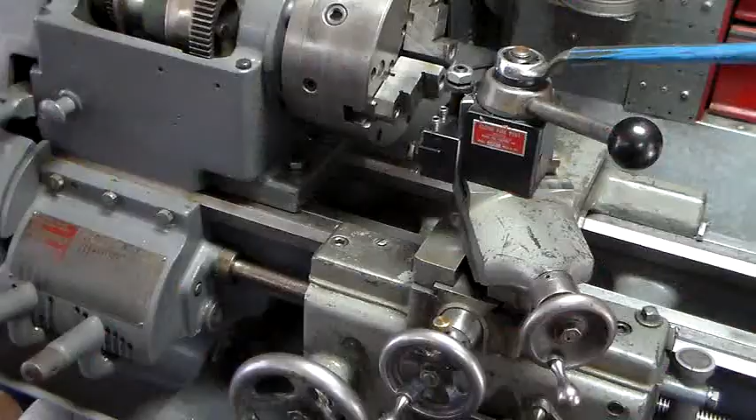Good afternoon. I'm going to try to show you why I spent the time to try to figure out a good carriage micrometer indicator holder for my old Logan flat belt lathe. I've had 2 or 3 of these over the last 50 years. And due to their casting design, there's not a flat spot on them. So every time you go to put an indicator on them, they just don't hold, they don't stick, they slide, they move.

Now, Abom79, Adam Booth is my hero. Of course, he's got big equipment where in the table area there's lots of room between that and the carriage. And that allows him to just take a mag base like this and throw it up here, and you can run it over and boom, you're in.

However, a lot of times this doesn't give me enough throw to work on the piece. And it's not very big, this is less than a ½ inch right here to where it actually mags on. And I mean, it's real scoochy and it moves around. Okay, so that was number 2.

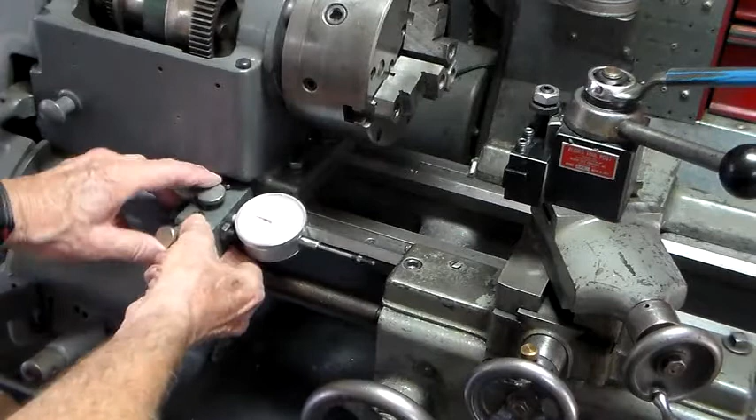The first one I tried to use was this, and this is actually something I made probably 30 years ago. This is a copy of the normal carriage stop for the Logan lathe, and you simply set it on like it normally went on, locked it down, and it worked great as long as you were working way out to the right. But of course what happened is you quickly ran out; the tool is still 2 or 3 inches away, and this is only a 1-inch travel. And you can't go any further to the left because of all the framework. So that one's kind of out.

All right. Now, what I wanted was something like I keep seeing Adam use on his YouTube channel, something magnetic that sets up over the way like this, and it sets on there and it's held by a magnet. And this is really very nice. It stays put. It allows you to come over. You can move it way back to the left, clear up into the pocket here. And the stem of the indicator misses this back here.

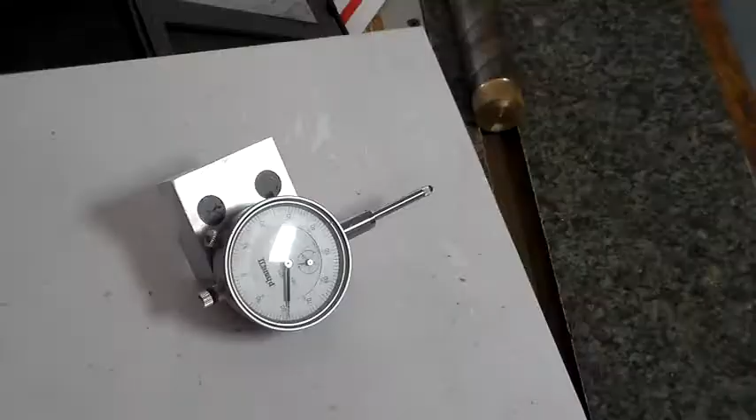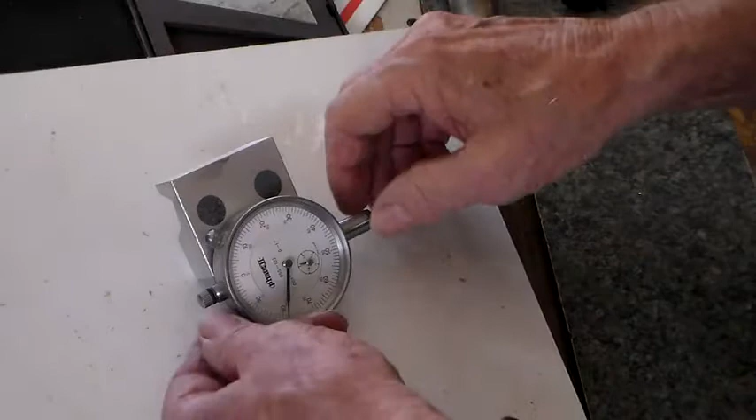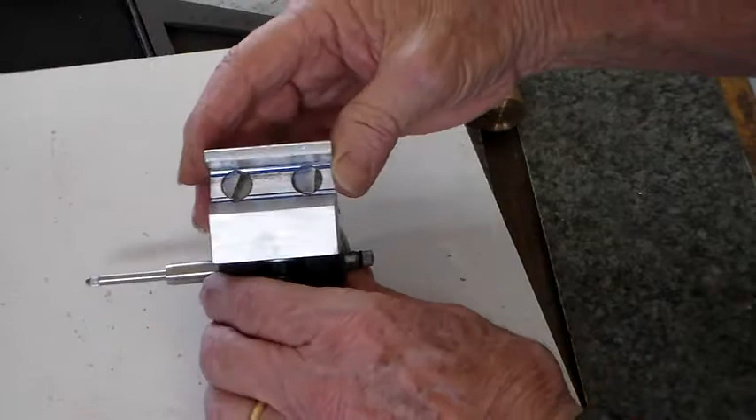Okay, so we'll first take a look at this thing all put together, and it's actually simple, but it's difficult to make, if that makes any sense. There's lots of angles, and one of the biggest problems, if you make it just like the original Logan carriage stop where everything is straight to a 90, is there's no clearance any place for the stem of your indicator to go out. So you have to drop it at an angle. So anyway, here's the back side, and this is machined out of a 1 by 2 inch block of aluminum.

The first one I made, I usually make them out of plastic or starboard or whatever you want to call it. It's easy to machine. I actually only made it 1 inch, and that gave me only one magnet. That was just not enough. Too much leverage, and it moved around. Okay,

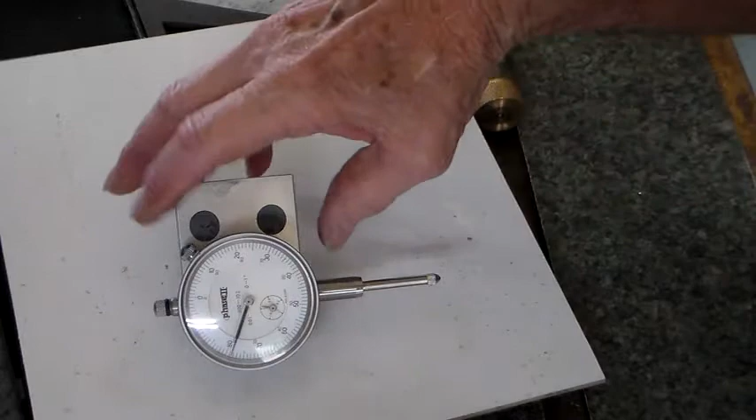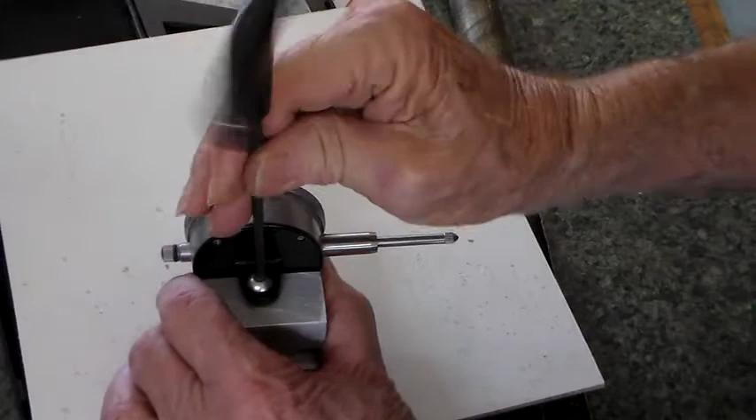there's one button head that holds it on, and I used a spacer washer only because the post on the back of this dial indicator is not perfectly straight. So here's a picture of the whole thing.

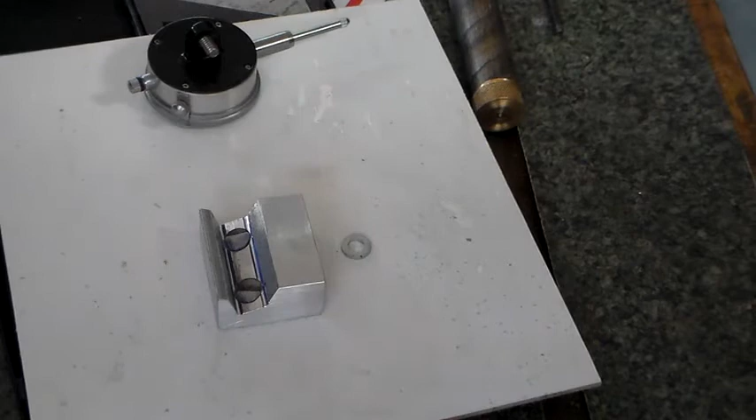This is simply JB Weld to fill up behind the magnets, and I used some of this Loctite 620 to fasten the magnets in.

And in a minute I'll go over how I did it on the milling machine, and really, it gets a little confusing with all the compound angles and the clearances. So anyway, let's take you over to the milling machine, and I'll show you how I had it set up.

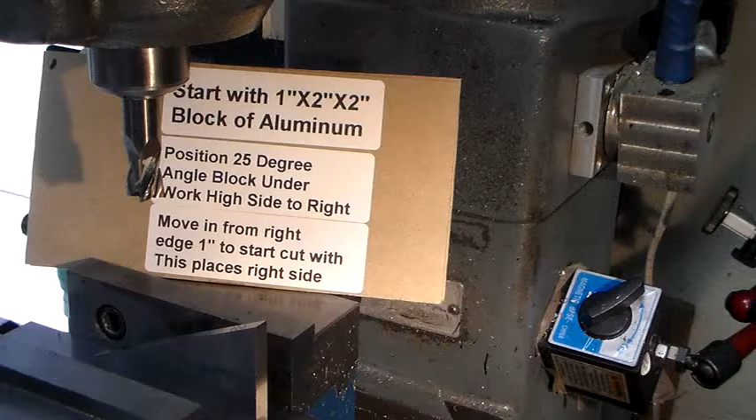Alright, now don't forget this is filler, and my neighbor told me I needed to display these dimensions and that's better anyway, but so anyway, here we go.

Okay, so we're starting with a 1 inch by 2 by 2 block of aluminum, or whatever material you decide to use. And here's our 25-degree angle block. We simply set it in, position it high enough so when you're cutting it, your milling machine cutter does not hit. Okay, now we're going to, actually, I'm not sure what's going to happen with all the filming, but we might even move off frame.

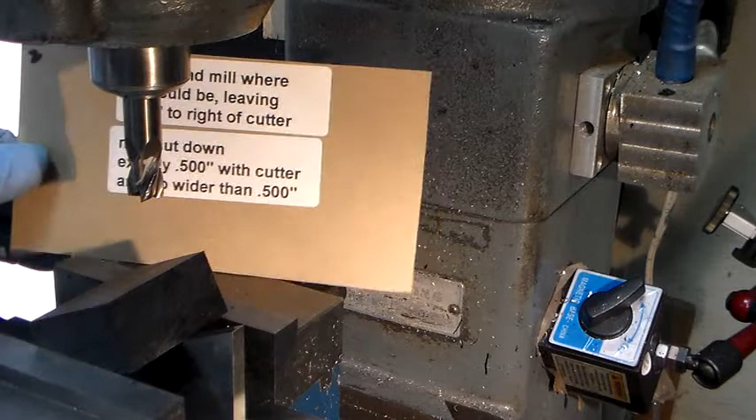But we're going to start over here and bring this side of the cutter down to this edge. And then we're going to move over exactly 1 inch. And for this demo, I'm not going to try to read my readouts because they're too hard to get to. So anyway, this places the right side of that cutter on a 1/2 inch end mill where it should be, leaving about 750 thousandths to the right of the cut.

Now, by the way, make sure you don't make this cut any wider than a 1/2 inch. In fact, this is an end mill that has been reground, so it's a little bit less. So then you simply start your cut and plunge down 500 thousandths, a 1/2 inch. So you're going to end up with a slot milled through here, 3/4 of an inch in, 500 thousandths inch deep, and the full width.

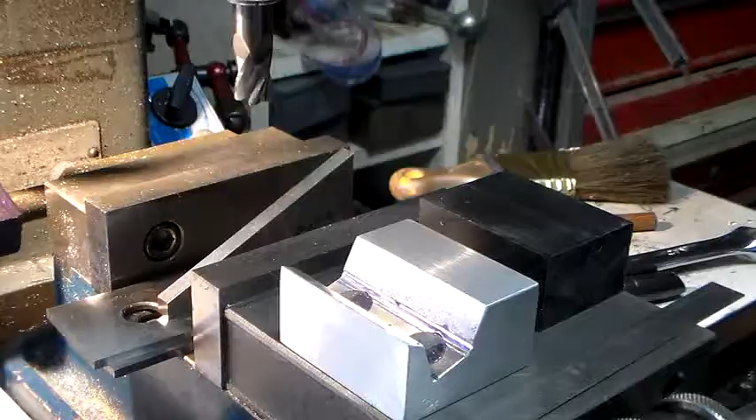And you're going to do it with a 25-degree angle block with the high side of the block under the right. All right, let's take the first step here, and I'm not going to actually machine a whole one of these because it's really a lot of trouble.

But what I found out, to get the correct clearance and the tilt you need on the face of the gauge to where you can actually read it easily and make everything miss all the castings and etc., is I use a 25-degree gauge block. All right, simply set it in. And this piece of starboard's not quite big enough, but it's going to turn out okay.

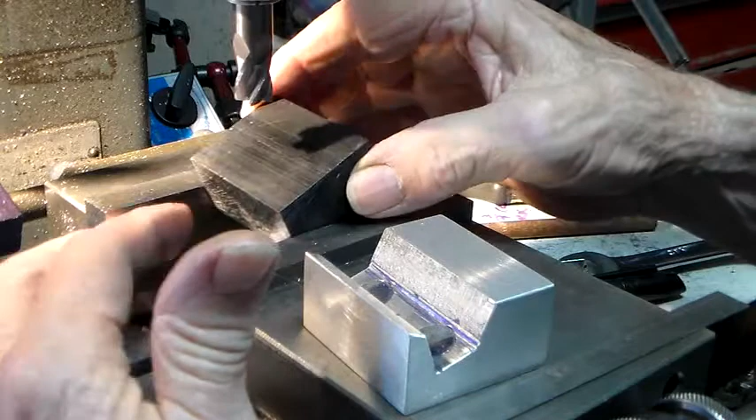So anyway, set it in the long way, and if you happen to have two of the 25-degree angle blocks, it's a lot easier. But with this, what I do is set it in, make sure you got enough clearance all the way around. Just snug it up, and then don't beat it hard, but take a brass hammer or something and tap the back of the angle block, and it'll square it right up to the bottom for you. Then go ahead and lock it down. All right, now you're through with this for a minute.

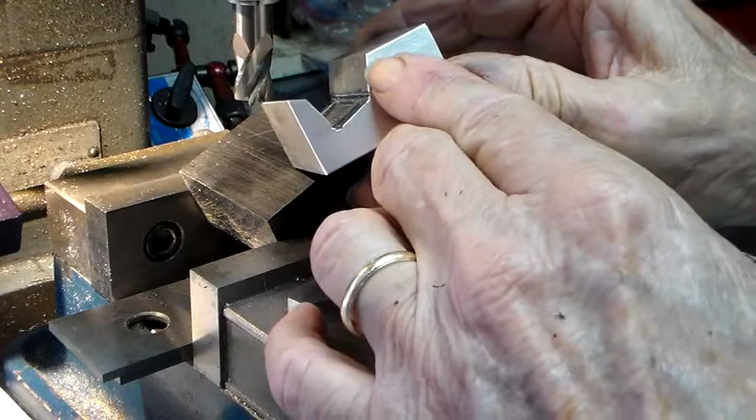Now the first cut we're going to make is actually this cut right here. Okay? So what we're going to do is take the far right hand side, in this case, of the 1/2 inch cutter, and we're going to touch off. I'm going to have to make this a little bit different than this one because the material was not quite the same width. But anyway, I'm going to bring it over like so and come down.

Start the mill. I guess it'd be better to have it running the right direction. I was tapping with it. Okay, so there we're just barely scratching it. I'm going to come back out here.

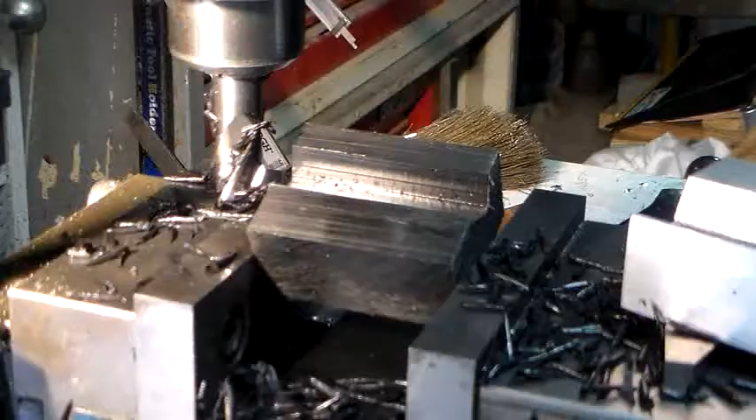Now I'm going to stop the camera for a minute. We're going to actually go down a 1/2 inch total. So everything is a 1/2 inch, a 1/2 inch, a 1/2 inch. Okay, my first cut was 300 thousandths deep, and I'm going to take the last 200. I'm running this slow because this plastic had a tendency to melt, or at least get sticky.

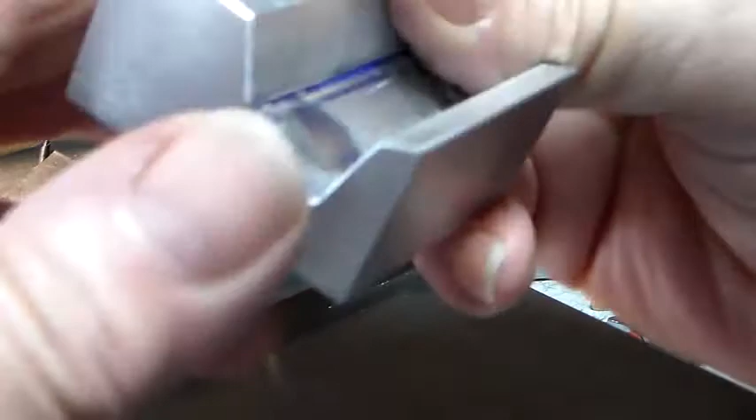All right, now that was step one, that you're going to use this 25-degree parallel on. Slide it up. Okay, now the next one, believe it or not, you're going to reverse it after a while, and you're going to turn this whole piece around, and you're going to use that same one to drill the magnet holes. Now I selected 1/2 inch magnets.

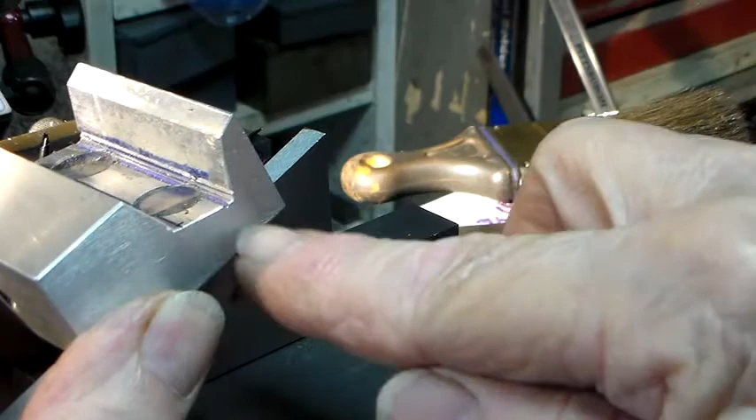Alright, and so actually you set the same angle block in like so, and you end up with this nice and level. Simply drill the 1/2 inch holes. I actually just used the end mill. I do suggest that you make them loose, though.

Don't do like I did, using the aluminum block and those hardened magnets. When I used the Loctite to put them in, I ended up driving them in and didn't get them as level as I wanted to. So anyway, make those holes a little loose.

All right, and then the last time you'll use this 25 is after you get the 90-degree V cut in here. You set it back in here and you cut this angle right here. So you're going to use this 25-degree angle block 3 different times. All right, let me get set up for the next thing.

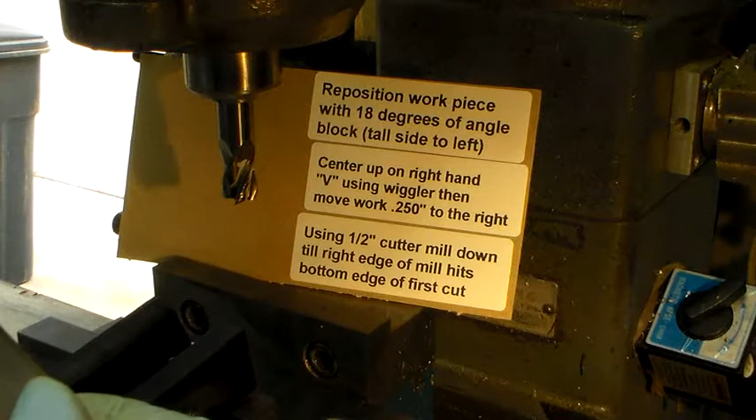So here we go again. We're now using 2 angle blocks, a 15 and a 3, for a total of 18 degrees. This time we're going to set the high side on the left. All right, and I'm going to use a workpiece I've already done before and simply show you that we're setting it up and tap it with a hammer to get it straight.

And what we're actually trying to do is mill this bottom here flat, and when you mill this flat here, this side automatically becomes 90 degrees to it, and that's actually your V. So we used a wiggler in here to line up on this side, and then simply move the 1/2 inch bit 250 thousandths to the left, or move the workpiece to the right, and then use that 1/2 inch cutter and you mill down until the bottom of this part you're working on now just kisses the corner of this side.

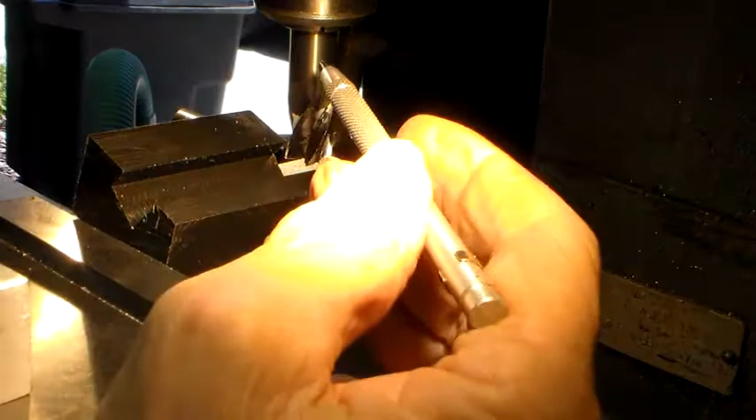All right, what I've done is removed the wiggler, put in a 1/2 inch collet and my 1/2 inch bit, and I've moved the table to the right 250 thousandths. The idea is we want this far right hand side of the milling machine cutter to end up right here in this groove. Okay, so here we go. Gonna make it in a couple cuts.

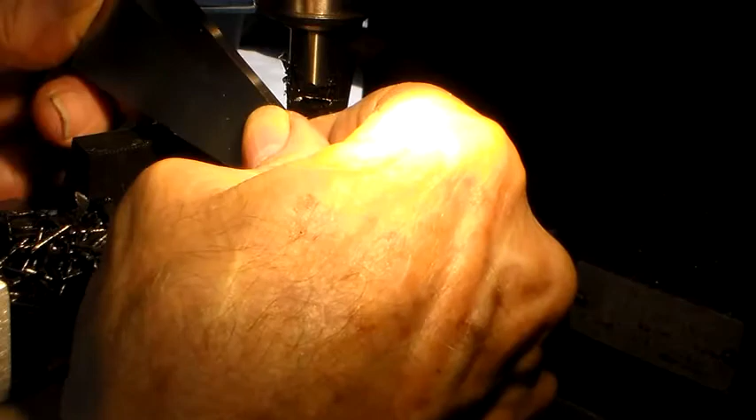And by the way, I apologize for not letting you know the angle of this, but it's about 18 degrees. So these 2 angle blocks put together give me 18 degrees. It was rocking between 18 and 19, and really for what it's for, I guess it's truly not that important. All right, and clean out some of the chips here.

Believe me, this really all looks weird when you're trying to lay it out. We got about 4 or 5 thousandths to go yet.

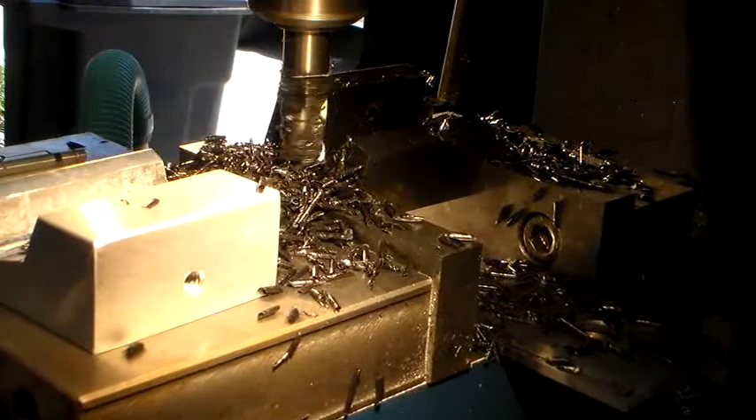So that's actually up in here. This is the 90 degree that sets on the way of your lathe, I mean the bed of your lathe, I'm sorry. All right, one other thing we're going to do in a minute is we're going to take a little 3/16 milling machine cutter, and we're going to cut a bit of a relief here and a bit of relief here. I found it makes life a little bit easier. Okay, I'll get set up for the next one.

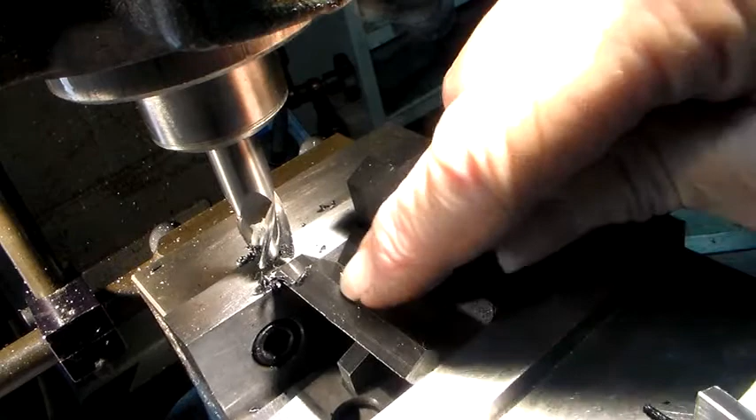Alright, if you remember when I first started the first cut, we used this 25 degree angle block, and we made this cut here 1/2 inch deep. Okay, then we used the other 2 blocks combined to make this actual cut down here, the 90 degree in the bottom. And I told you we'd be using this angle block a couple more times. Well, this is the third time, and we're just cutting the top edge of this off so there's clearance on the bed of the lathe on the flat part on the front V-way. So here we go.

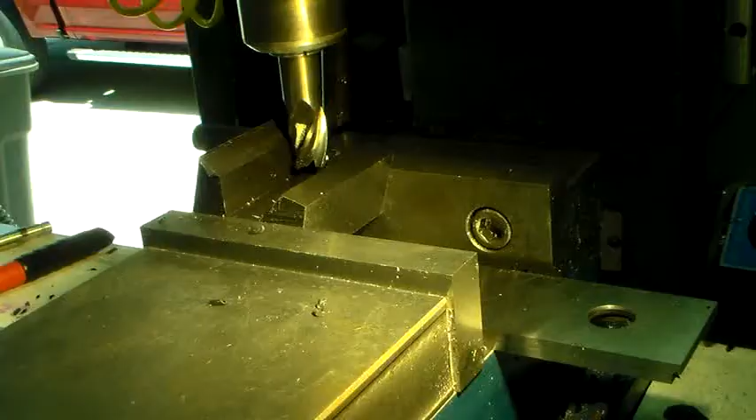Alright, I'll get set up for the next cut. Alright, actually, it's easiest to do the plunge cuts for the magnets just to line up this cut here with the top of your vise. It's not critical, it just lets the magnet meet with one of the 45s on your lathe way.

So I've come in, I used the old paper trick to get close to this edge within 1/1000th or so, and I come in and we'll leave 1/4 of an inch at the back, then we'll come over and leave 1/4 of an inch on this side, and hopefully I can do this. I think I'm just going to raise the table. That way I can stay out of the picture a little.

Now, drill all the way through. On the back side of mine, you saw where I used JB Weld to fill it up. That way, if you have a problem, you can fix it.

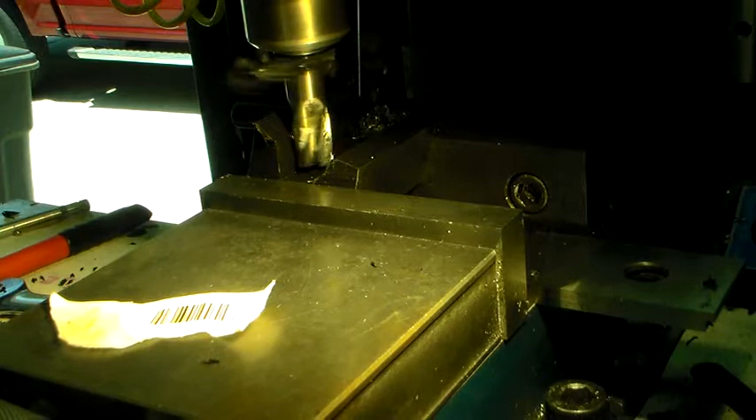Now, I thought it might be necessary to put additional magnets on here, but trust me, two of them hold like a freight car. Okay, I'll be back in a minute.

Okay, what we've done is I took my indicator and set it on here like you would really want it. Because I've checked a couple indicators, they're not all exactly the same size as far as the depth of the hole on the mount. So I drilled it 5/8 of an inch deep with a number 7 bit. This is a 1/4-20 tap, and we're just going to go down a ways. Going to slow the mill way down.

There's a 1/4. There's a 1/2. That's about it. Reverse the mill, back it out. I put this permanent magnet 1-horse DC motor and a control on here years ago. Best thing I ever did. Makes life really easy. Now off camera, I'm going to go ahead and run a bottom tap down to get the most clearance I can. See you in a bit.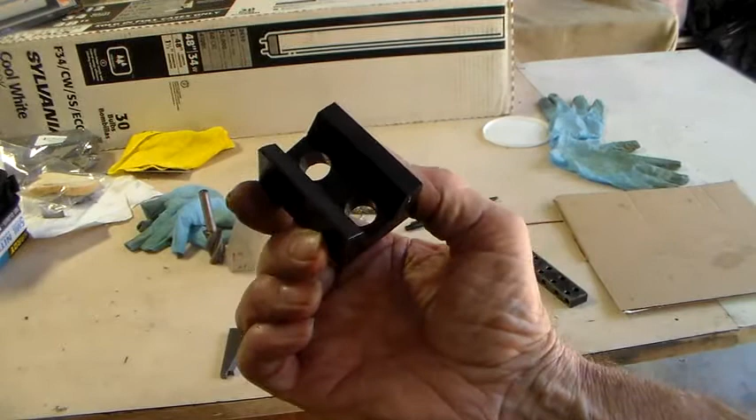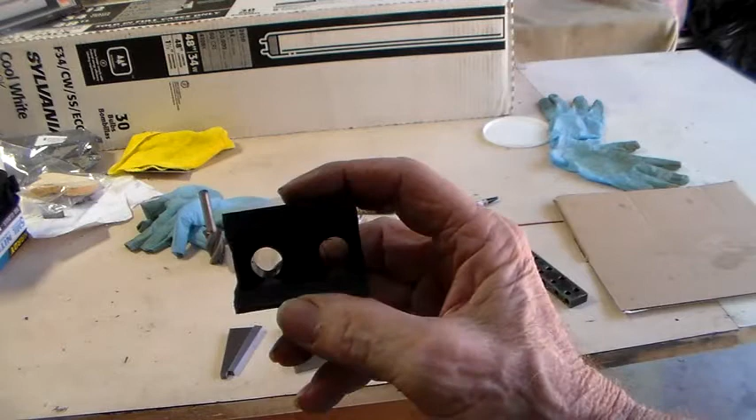Okay, so now the part's pretty well done. I don't know how well you can see that. The angle's all cut. Holes drilled for the magnets. Drilled and tapped to attach the dial indicator. So I'll go ahead and clean it up, mount the indicator. The only thing I won't do is put the magnets in it because I don't really plan on using it.

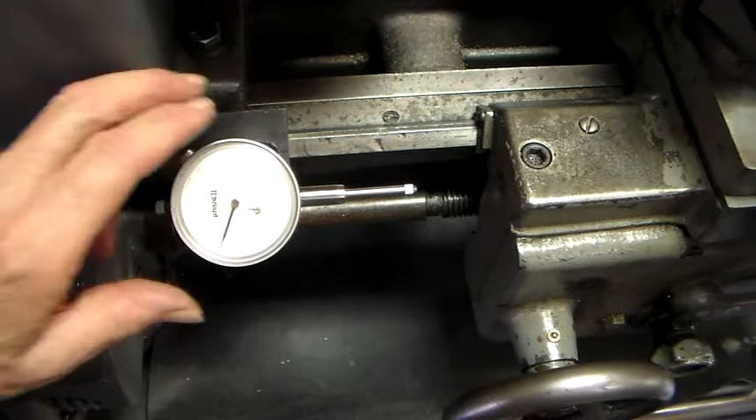Alright, so here's the part we just made. Indicator mounted. Sits right up there. The two magnets will hold it securely in place just like it did on the aluminum one. And there we have something we can move any place we want. Whoops.

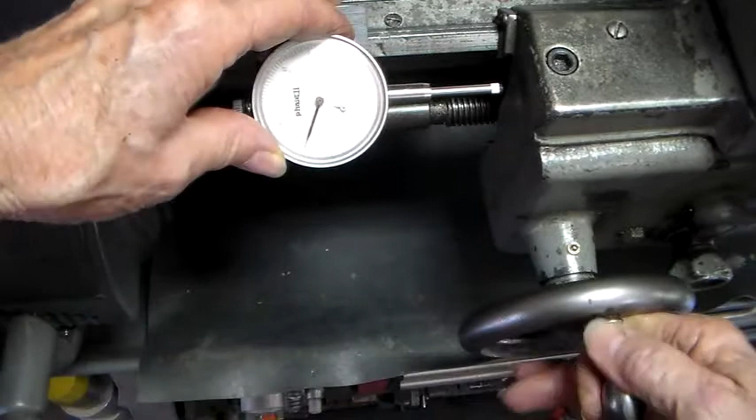No matter what length material we're working on, it'll move all the way back up here in the pocket, which actually, if you tried to contact the indicator, the cutter would crash into the chuck up here. So you get plenty of clearance. I guess you could actually run it with a collet chuck and maybe use the full capabilities.

All right, hope you enjoyed the video. I'll try to draw up some pictures with the angles, etc., on it. Later.

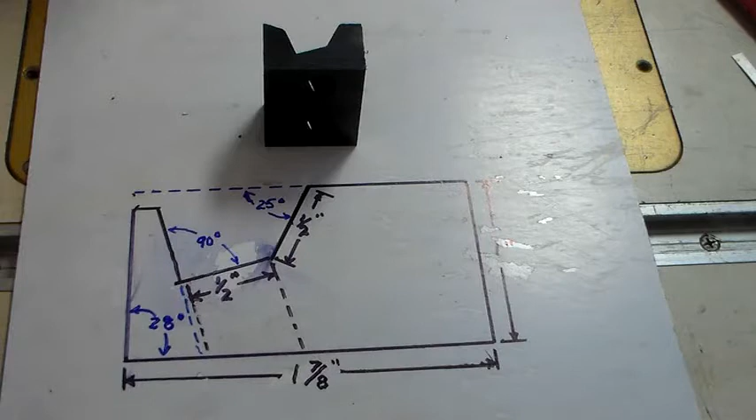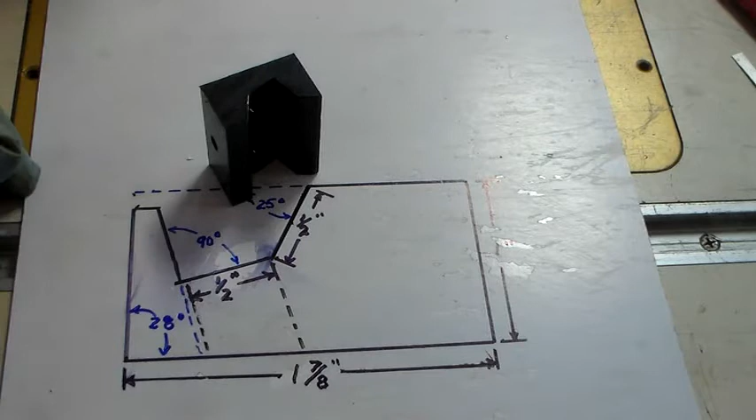All right, to wrap up this video, here's a drawing, and I'll leave it here for a bit. And the outside dimensions, of course, this is taking a look at the end of it. Okay. And the important part is that this V right up here, this is a 90, and that fits on the way of your lathe, the bed. And this is the same 90-degree V right here. That shows you this is a 90.

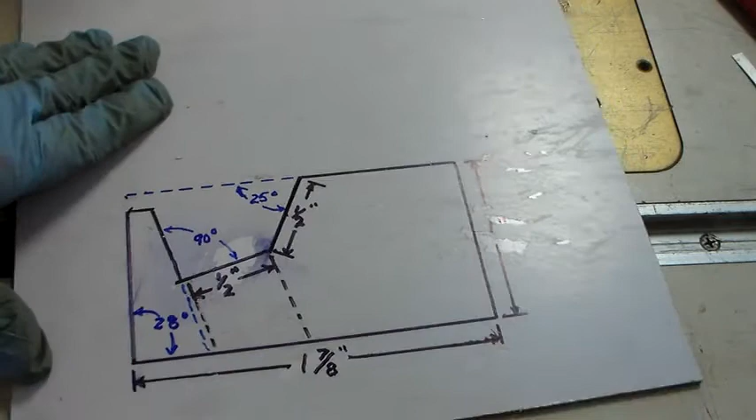These are the other degrees, and like I told you before, to get these, your first cut, here's your milling machine cutter coming in this direction. This is standing straight up. You place a 25-degree angle block under it, make that cut down exactly 1/2 inch.

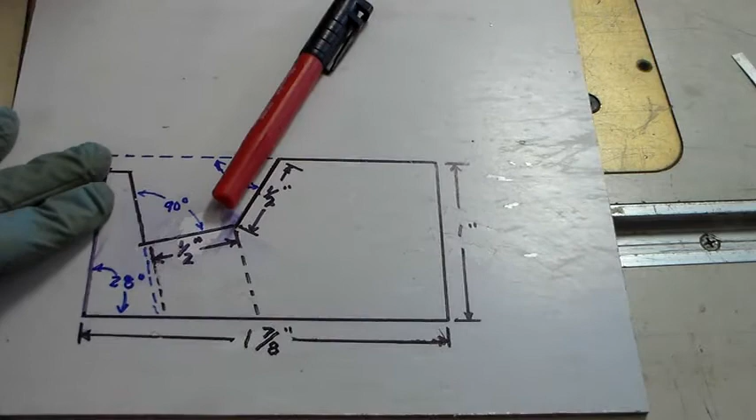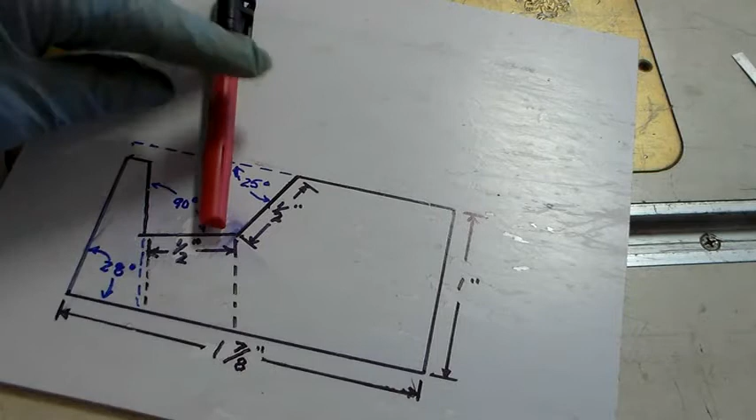All right, then you turn it this way, and this cut, you line up your milling machine bit where the outside edge is just on the corner of this, and I used a wiggler. Then you move it over 250 thousandths, and then you machine this the same thing, straight down 1/2 inch to where these two corners meet. All right.

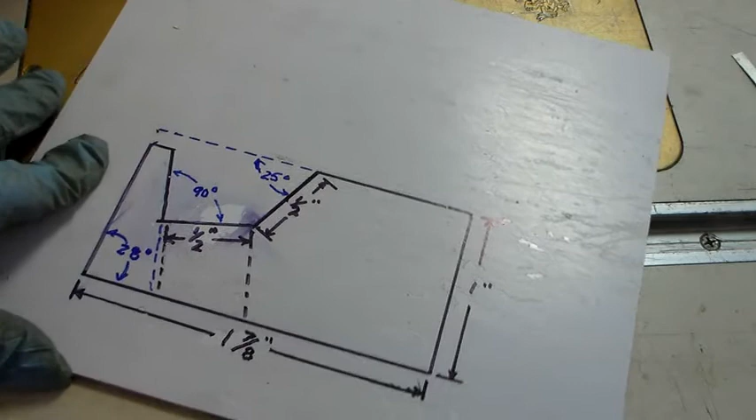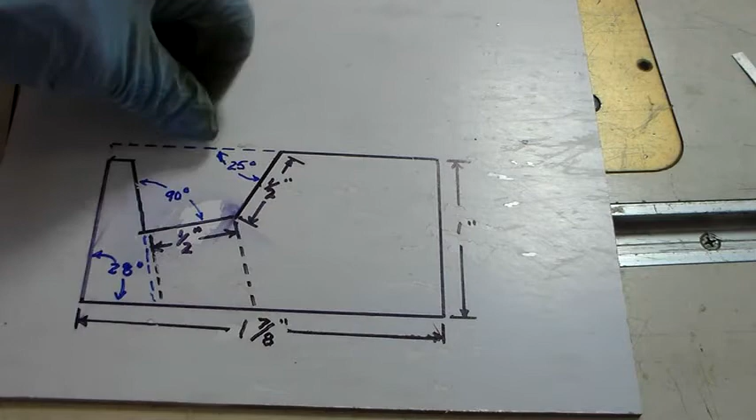Here I'm trying to show you one of the degrees, this is 28 degrees here, what you end up with. So from the bottom straight edge, the only two straight edges on this thing when you're done are here and here. So from here to here it's 28 degrees. Coming across here, this is 25 degrees. So you lay your block here and face it down, it's 25.

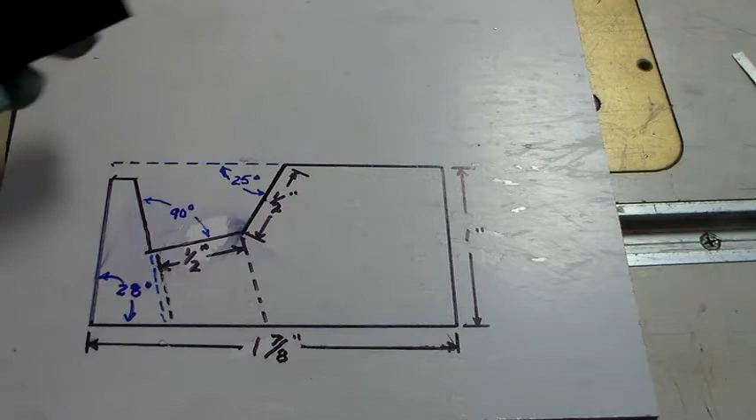So I hope this is clear as mud to you, but your overall dimensions, this shows 1 7/8. It was because the piece of material I had had been machined a little bit already. Could be 2 inches. The length of the item, this end you're looking at the width, the length can be anything you want. About 2 inches was fine.

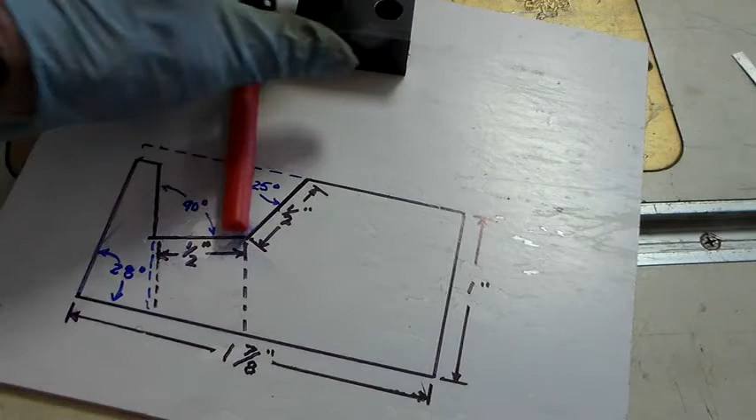This hole right here with the dashed lines shows you that while you're set up in this operation with your milling machine cutter this way, cut your slots and then turn right around and drill the magnet holes. Like I said, I used 1/2 inch diameter. They're about 3/8 thick and they're really quite strong. Drill those holes all the way through. So this represents a through hole.

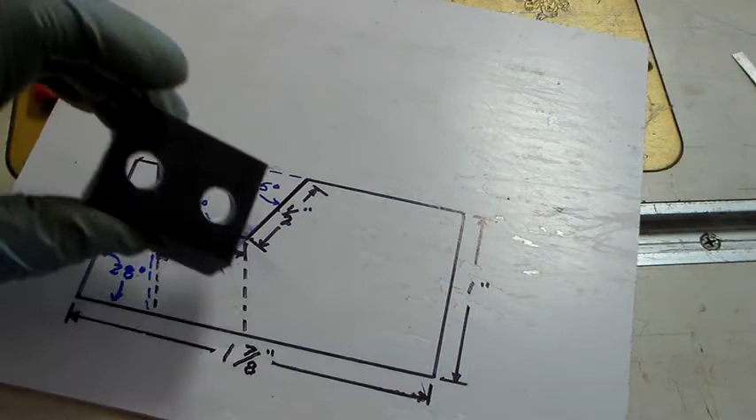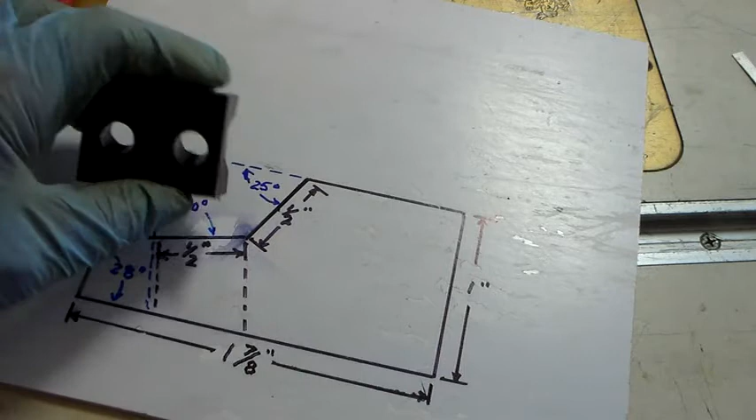Make it big enough so when you put the magnets in the block, put whatever you're going to use to fasten them, like I said, I use Loctite, and then simply grease your bedway, the V, the front portion, and set that on your lathe bed. That will pull the magnets in tight.

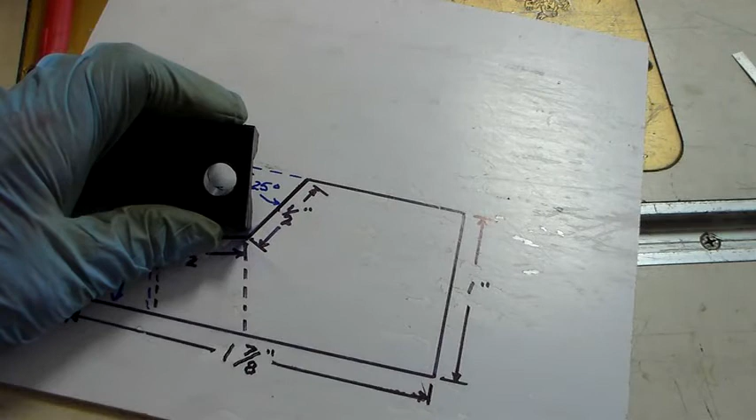The grease or oil will keep the Loctite from sticking it to your lathe, and then just put pressure down and hold it in place. Let it dry overnight. That is a surefire way to get perfect contact with the magnets to the V on your lathe, on your way. So with that said, hopefully you can get some use out of this.

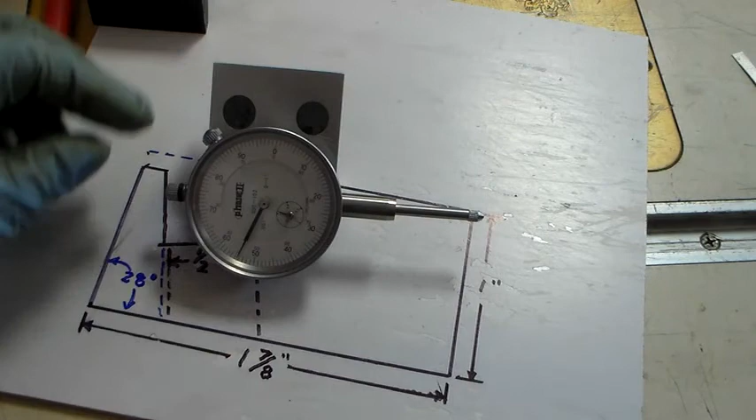Anyway, I love it. It's the only thing I've found in 40 years of messing around with Logan lathes that will fit up into the pocket and lay down at a nice angle to where you can read it. You can simply move your dial any place you want, and like I said before, you can reverse this and put it on the tailstock side of your lathe if you want to work it that direction.